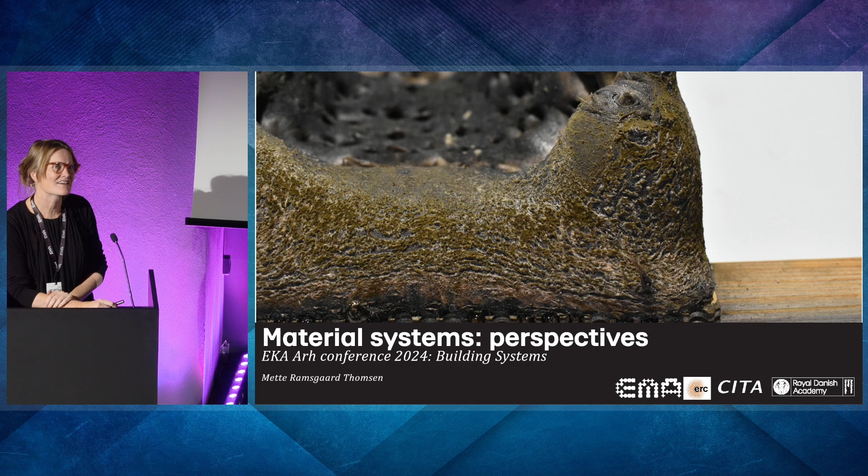I think it's a really nice nesting of different questions. I want to show some of the projects we've been working on for the last couple of years, and obviously Cameron has already shown some of this work. Just to say a little bit about CITA.

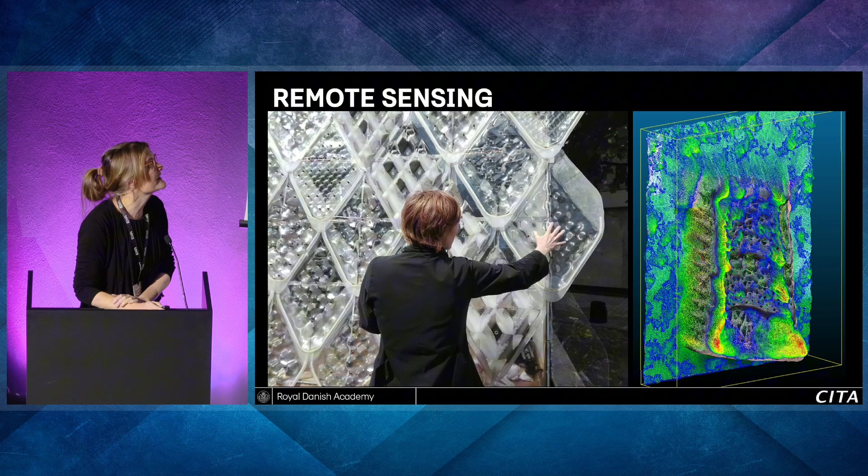CITA, I still have this feeling that CITA is all new. I don't know if you feel the same, Fabio, but it feels still so fresh and young when we started all these things, but it is 20 years old. I think CITA has been many things over a long time, and really the people that passed through CITA have also informed our practice and left deep marks in how we are thinking about our practice and the questions that we ask. We look at questions of robotic fabrication, new material processes, advanced modeling, remote sensing.

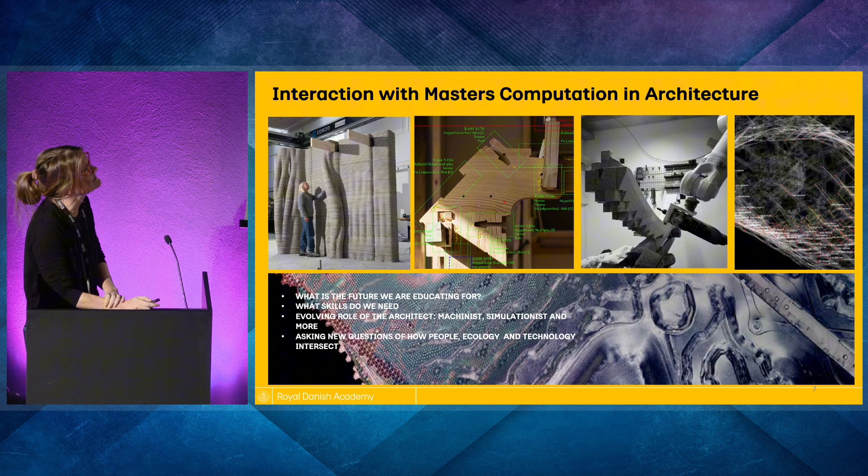And we work very closely in interaction with our master's group, Computation in Architecture, led by Paul Nicholas and Natalia Guillem, where we are looking at similar questions: what can architecture become, how is it that we are working with materials, what is the future that we are educating for, and also what is the future role of architects—to not take for granted that architects somehow perform the same as 100 years ago, 50 years ago, even 20 years ago.

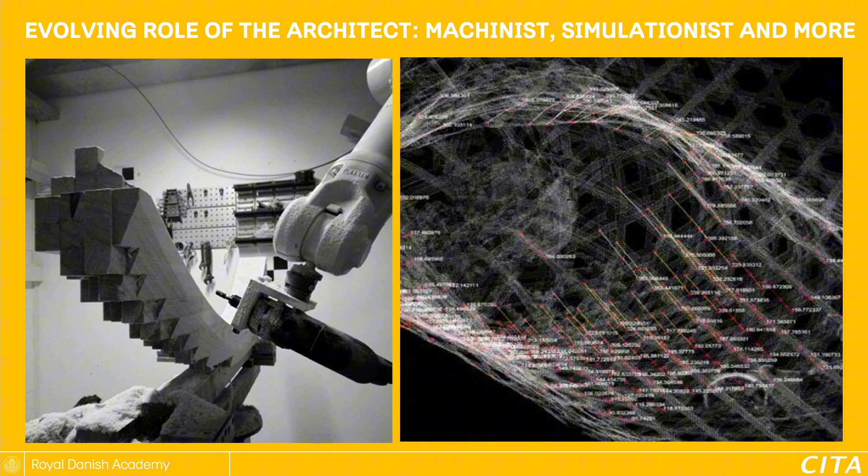I think the tool sets we're working with, the questions we are addressing, the ways that we can design and fabricate, are radically changing. And it's important that our educational environments and our research environments are very closely knitted to create those synergies.

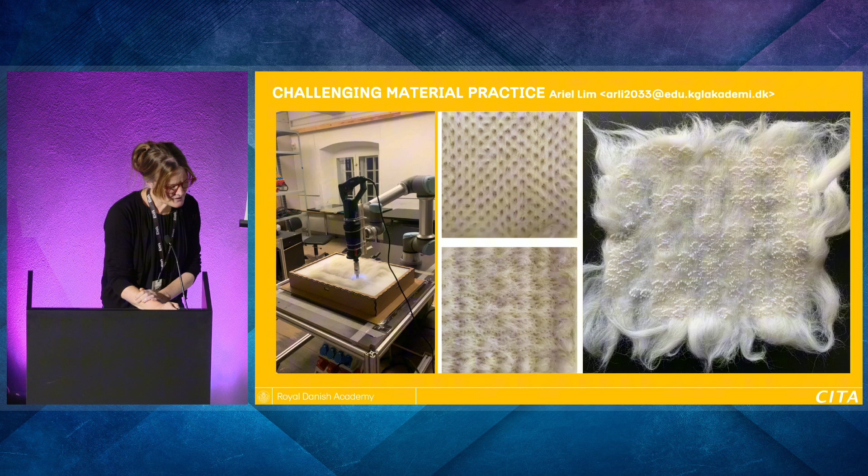Maybe most fundamentally, and what I wanted to talk about today, is really the role of technology and the idea of technological development. We work very much with an idea of design integration, where we ask how we can think of design as a driver for technological development, but also a fundamental understanding that technology is not something developed elsewhere and ported by invisible hands to the field of architecture, but that we are continually participating in its co-production. And by that I mean not just the architects, but the questions, the sites, the programs—the work of architects is changing and challenging what technology can be.

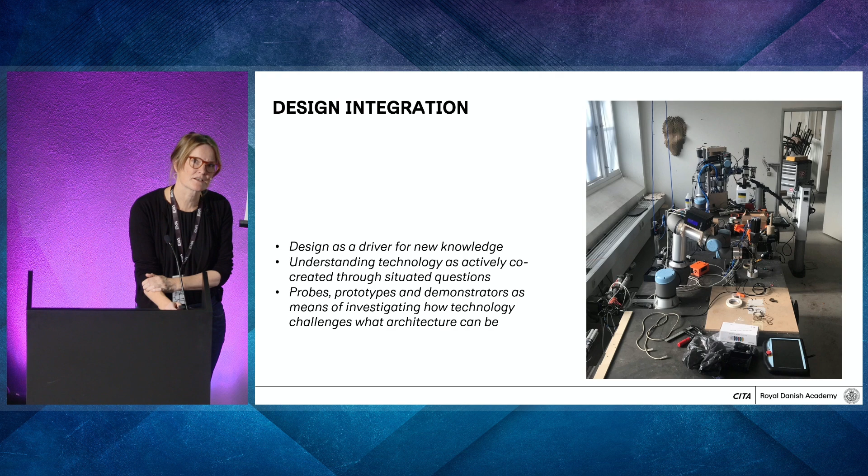And I think that's a very different starting point from many of the technological traditions that sort of boundary our field. So we understand digitization as a basic research question, which creates new possibilities for what architecture must be able to do, how it's executed, and through what and by whom it is constructed. A bit close to your man and machine, no? So how do we ask also who are the people who are involved?

In our part of the field, and here I talk very broadly about all of us in the digital design field, I think the idea of sustainable practice has been quite fundamental for the whole foundation of the field, but it has very much been linked to a question of optimization. So it has been under the remit of smarter with less—how could we optimize our practices and de facto build lighter so that we can reduce our impact on the environment, on resources, on transport, and on pollution.

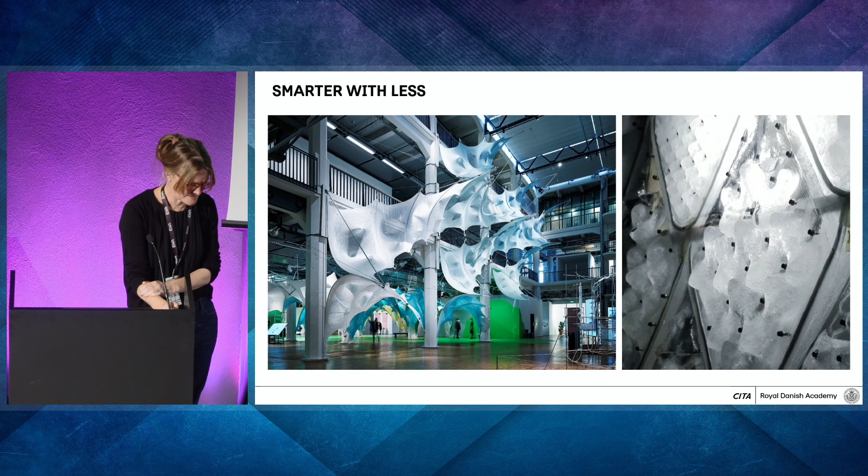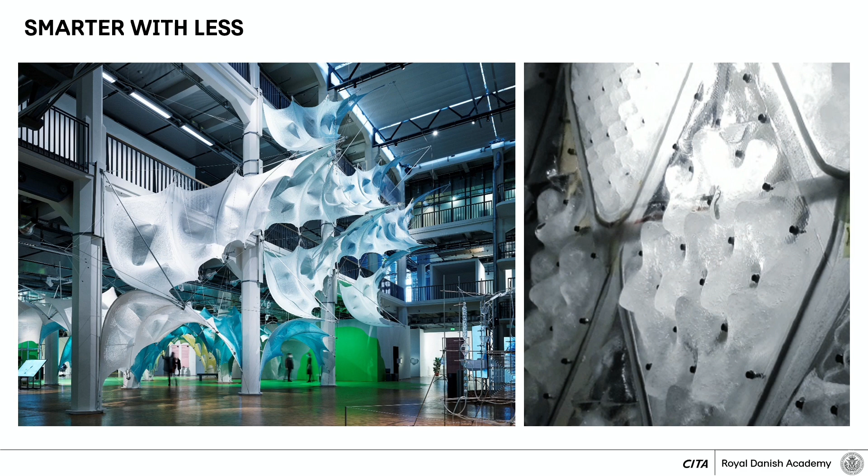And in our work, this has also informed a breadth of projects, which really span across these 20 years of architectural investigations we've been involved with, where we have been asking how computation allows us to work with new ways to use traditional materials, or traditional ways to work with new materials, and how that really allows us to think very differently about what materials can be, and exactly where the role of representation, the computational model, the information model, changes its role inside of the practice.

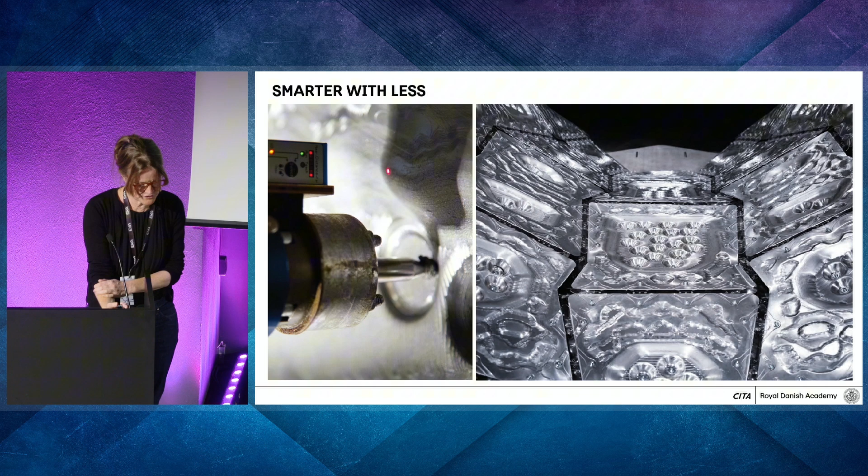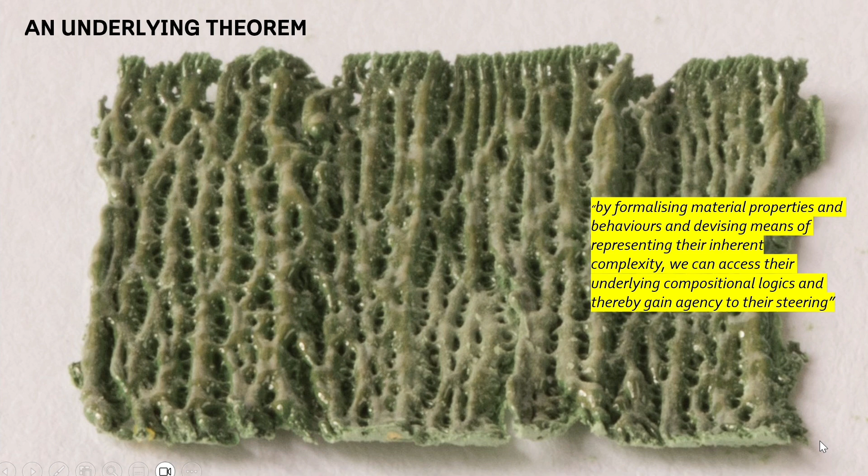And where we can connect with new ways of shaping functionally non-standardized materials, optimized at a micro level, with the breadth of architectural practice. I think there's an underlying theorem—it has different names in different parts of the field, it feels like every design group or computational design group has its own name for this—but what's underpinning it is really a rationale or theorem. Nobody knows if it's true or not, but a theorem which is that by formalizing material properties and behaviors and devising means of representing their inherent complexity, we can access the underlying compositional logics and thereby gain agency to their steering.

I think in many ways what Fabio was also showing today was also this sense that you can somehow steer the material logic, the structural logic, and thereby also gain, when we are showing these foam experiments, how do you steer these material systems?

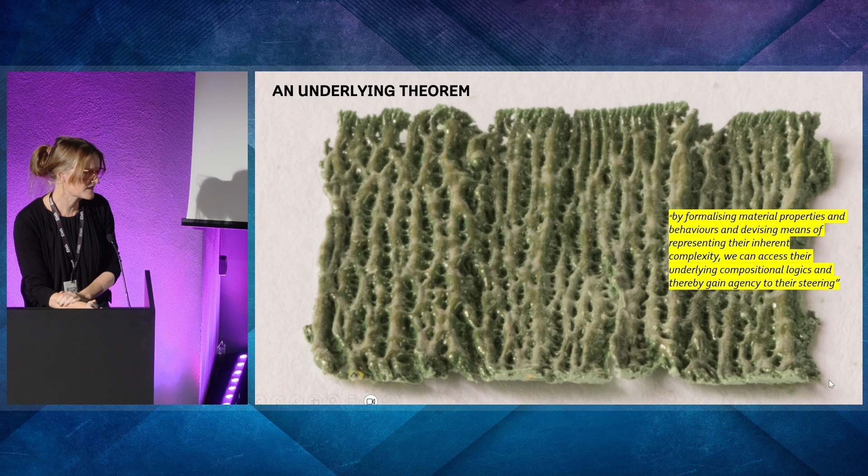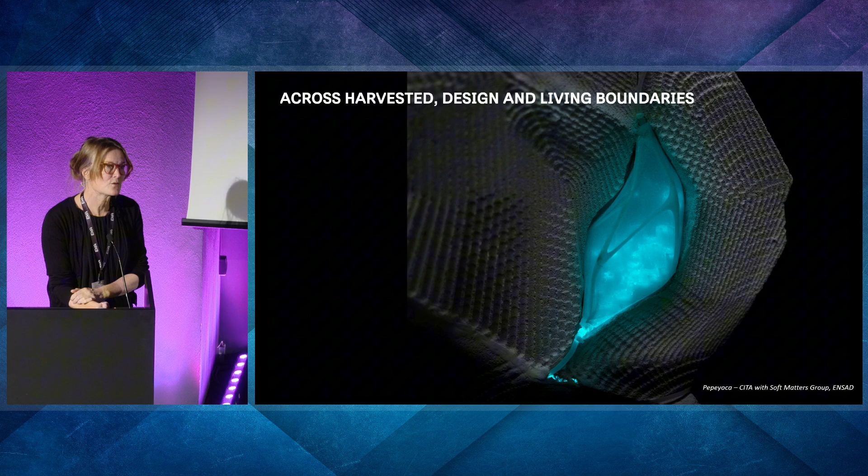I think we should remember that this is a theoretical position. When we start designing new boundaries for our field, it becomes a question of what is the material system we're trying to develop or interact with, and that we're expanding our system boundaries as we start working with living materials and engineered materials, so that what we are steering is not only a piece of steel or some concrete, but also organisms that have symbiotic relationships and are co-producing our designed spaces.

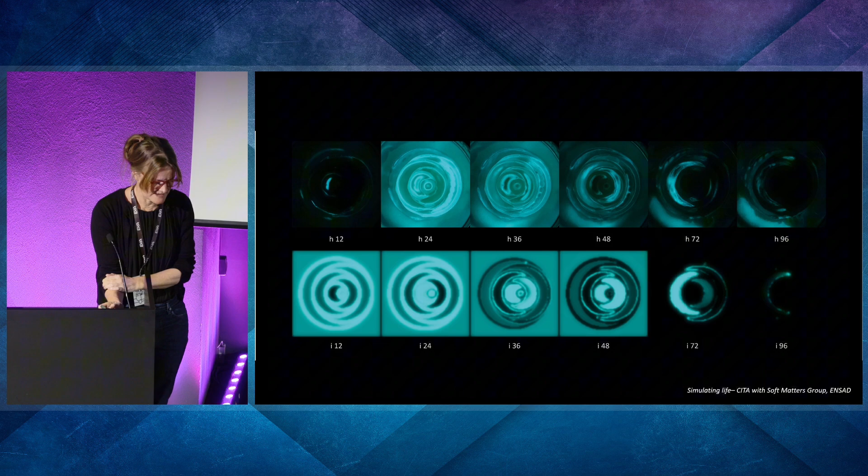Yeah, so this idea that we can understand, represent, and control in order to functionalize material systems for architectural use. I wanted to take that as a springboard to think through our newer projects and start setting some questions to that theorem.

Here I wanted to talk about the EMA project, the eco-metabolistic architecture project we've been working on for the last 3 years, with 2 years left, which asks what are the transformative shifts that working with biomaterials have. In the field we see a lot of movement towards bio-based materials, towards timber, towards renewables, and there are straightforward sustainability questions that lead us into this. But I think what's very interesting about it is it's a relatively uncharted field.

Timber construction is 20,000 years old, we've been building with timber forever. But at the same time, only 10 or 15 years ago, timber was still considered an experimental material, a material that is difficult to control, difficult to fire regulate, and difficult to engineer in more than single-story or double-story buildings.

So what we're asking in the EMA project is really, how do bio-based materials in a broader range allow us to think very differently about architectural axioms such as durability and permanence. It changes our understanding of value, of durability and fabrication to work with materials that are essentially metabolistic, that have embedded into them a system of return, or a system of biodegradation.

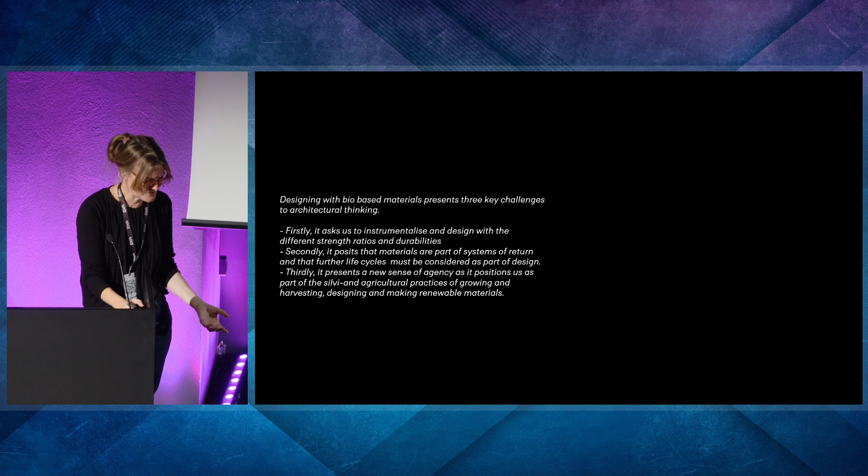Now, bio-based materials are essentially weaker and less durable than their finite material counterparts. Secondly, it argues that materials are part of systems of return, and that additional life cycles must be considered as part of a design system.

And also, it presents a new sense of agency as we participate in cycles of growing and harvesting materials. Here I mean in the really big sense, yes, grow, harvest tree, but also grow, harvest algae and bacteria, and the whole breadth of material systems.

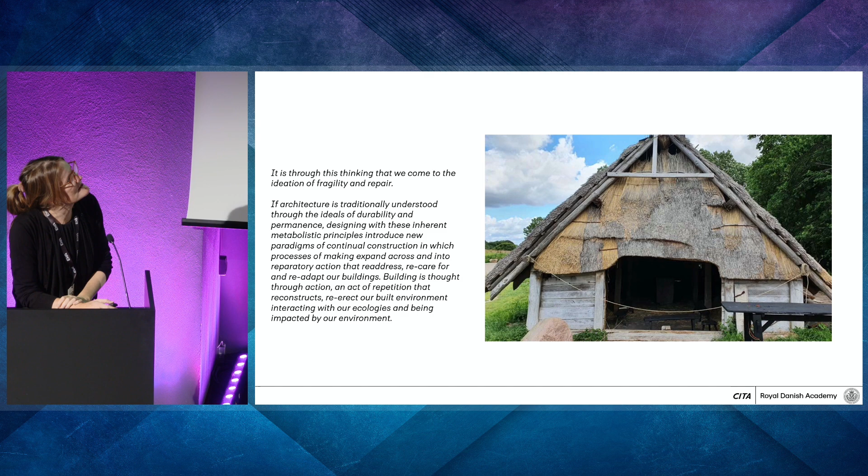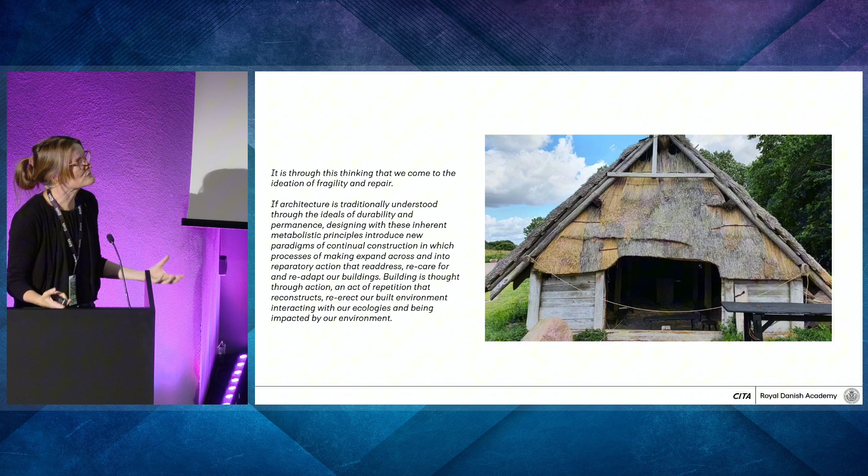And this leads us to a very different ideal. As Cameron was showing before, I think what we're interested in this picture is this idea that some of that thatch is new, done last week, and some of it might be 300 years old. So how do we build buildings that are continually constructed, continually addressed, and how do we develop systems that are able to think about materiality across multiple life stages.

And orchestrate their systems of replacement or systems of repair.

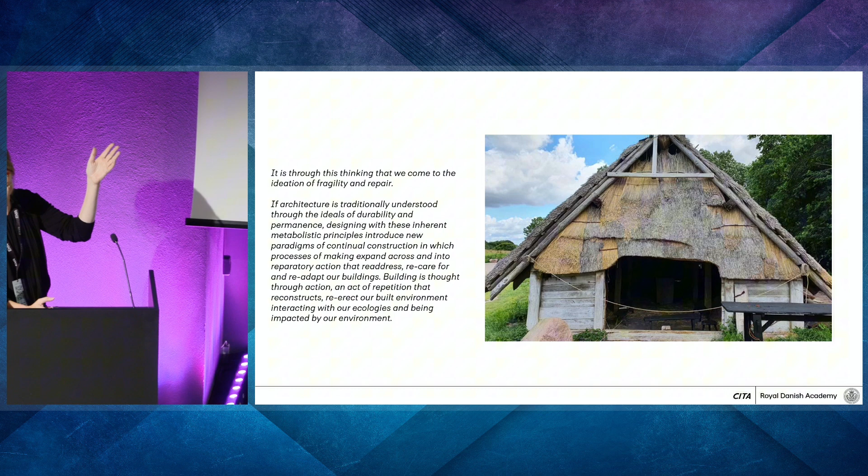So sometimes I feel like it's interesting to remember Corbusier looking over the Parthenon, or what was the modernist ideal? It was an idea of durability through material solidity. And when we turn to bio-based materials, we start seeing something that has a very, very different temporal clock.

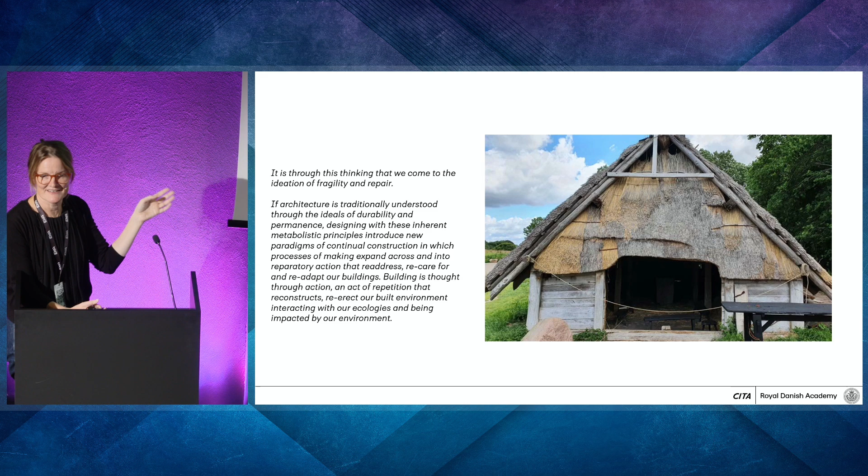And in reality, it is not so novel. We have been repairing our buildings forever, but we might move our gaze and look towards that kind of time, where time is constructed through ideas of re-engagement, and therefore build ideas around stability and endurance as performed acts, something we participate in.

A big piece of rock lasts forever, or I participate. I'm very curious towards that.

Again, I also want to just put a caveat into this. I think it's really important when we work with bio-based materials that we remember we cannot grow ourselves out of the problem. It is not possible to place ourselves in a fully renewables economy. There is a finite amount of photosynthesis happening on the planet, and the moment we start using that photosynthesis to grow plants for built environment products, food, all of that, there's something else that suffers.

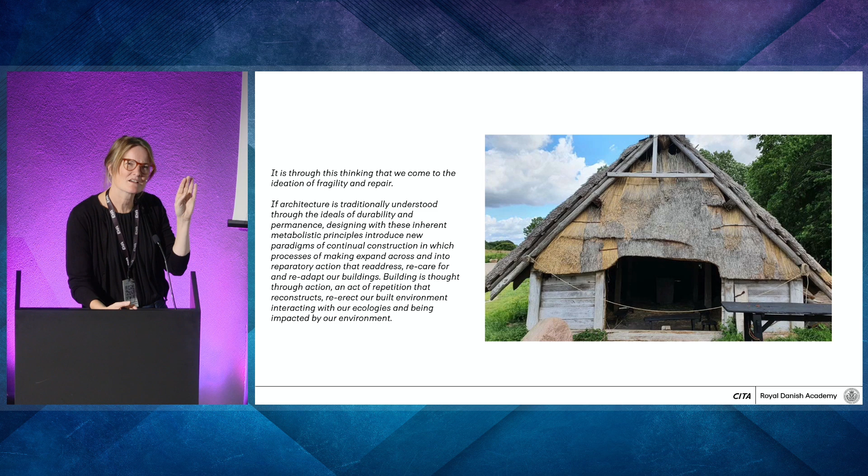So I think it's more just a curiosity. How can we build new models, and how can we bring these models back to a more holistic way of thinking about circular design and replace circularity.

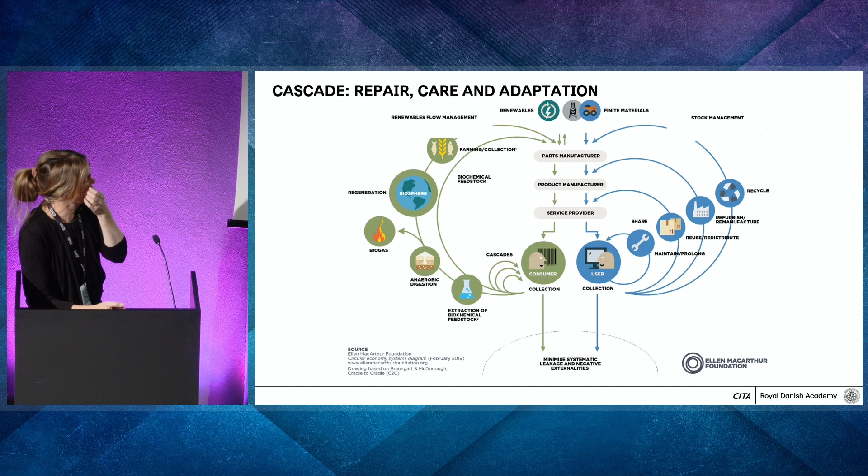Yeah, so I'll try to come back to the script here. So in ways that we have been looking at, this is also a critique of the circular design framework.

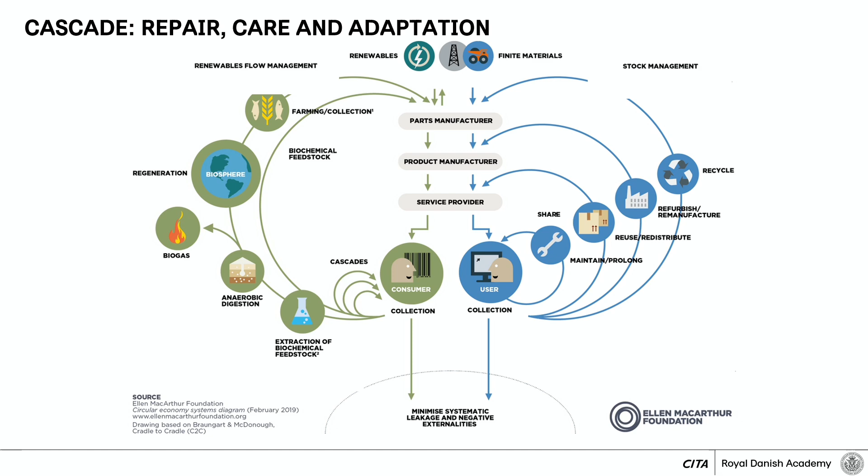Again here, as Cameron also did, placing the Ellen MacArthur butterfly diagram as a sort of core inquiry. Here we see cascading, and we also see the difference between the blue side, which is the finite materials like steel and concrete, and the green side. We can also see that things here are not really cascaded, but rather sort of metabolistically downgraded, finally ending up in energy.

What we're curious about is how we can build new models on this green side and kind of fold the butterfly together to find new ways of working with finites also, challenging us to think very differently about lifespan.

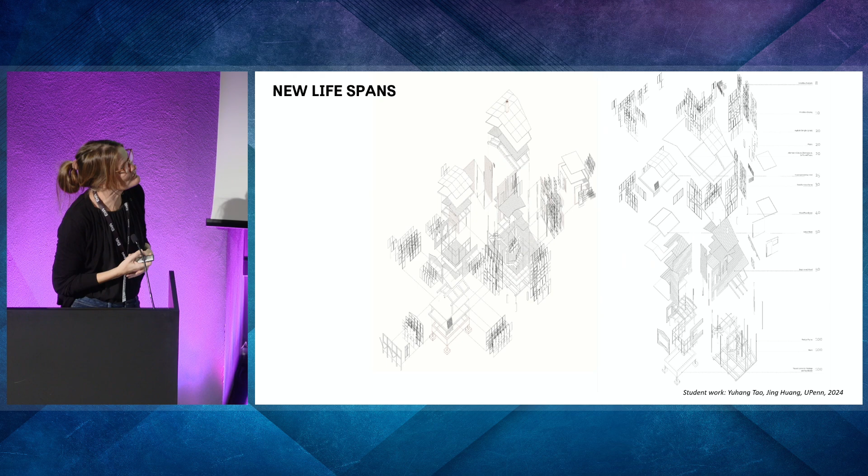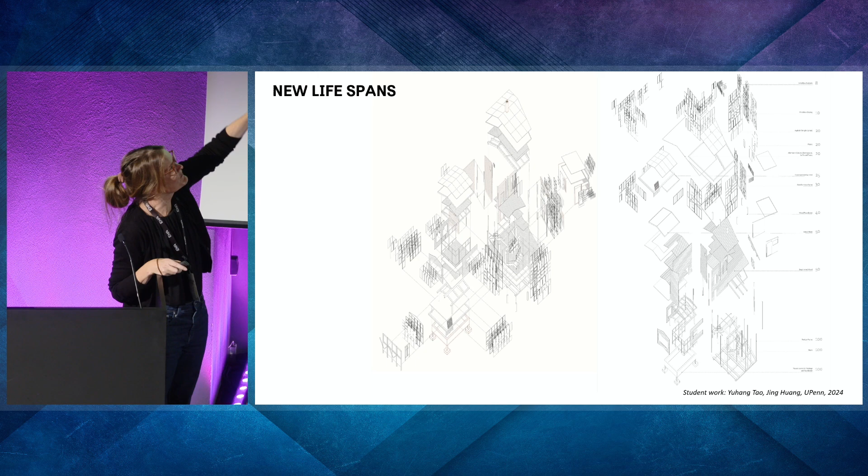These are drawings of small huts in Christiania done by my students in the US, who are really looking at how we think tectonically about how materials are placed together, but also temporally thinking in lifespans, placing the deeper lifespans at the bottom and the shallower lifespans at the top.

And placing ideas of continual construction around ideas of technological development. One of the key things we've been very interested in trying to develop is ideas of placing fabrication into these cycles, thereby challenging the sites of production and also the idea of technological development.

I think it's such an interesting concept, the idea of broken world thinking coming out of science and technology studies from the Anglo-Saxon context. It's quite an American and UK-based theoretical field, which comes out of ideas for media studies, telephones, and repair workshops, where Steven Jackson from Cornell very assertively positions that the world is always broken.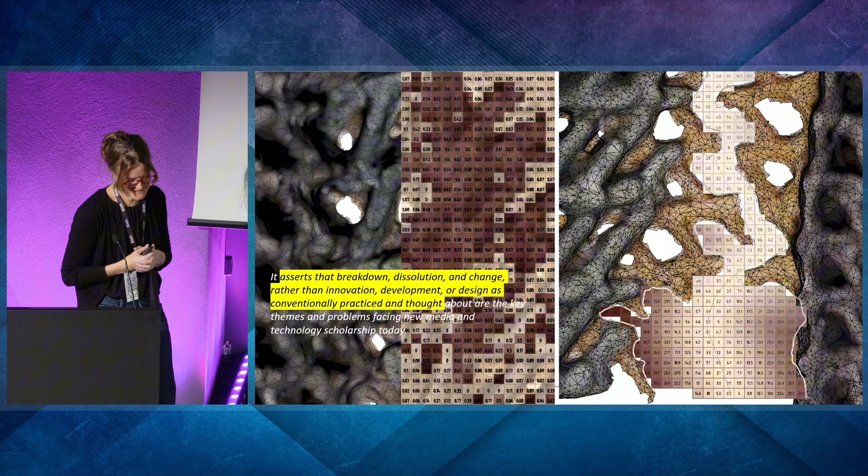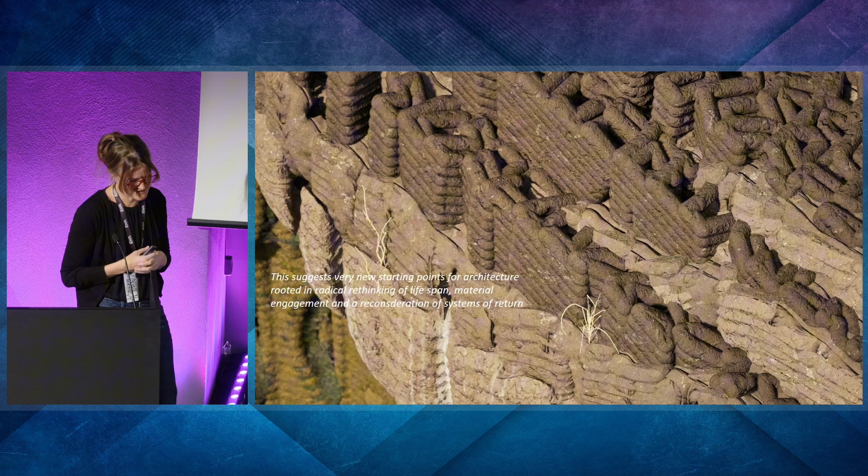So it asserts that breakdown, dissolution, and change, rather than innovation, development, and design as conventionally practiced, are the key problems facing new media and technology scholarship today, and that suggests very different starting points for architecture, rooted in a radical rethinking of lifespan, material engagement, and reconsideration of systems of return.

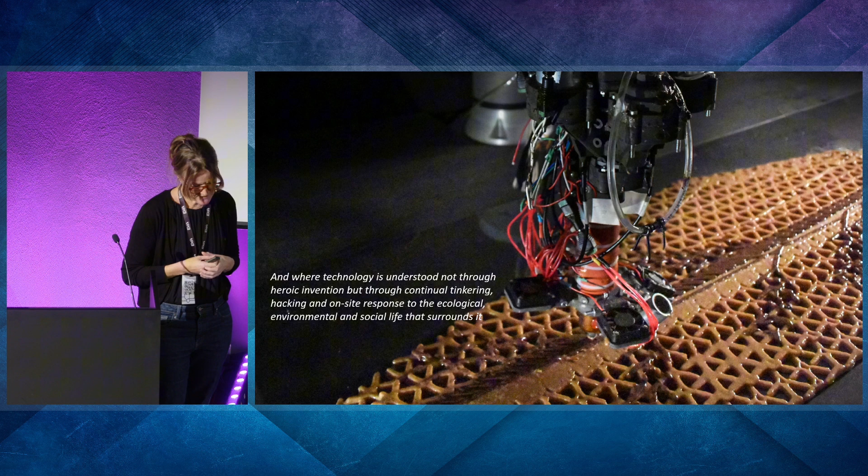So at CITA, we're very inspired by this because it sort of changes our foundations, both in the condition of architecture as well as its invention. So how is it that these technologies are orchestrated? Where are they placed? How do they move from the comfortable, secured walls of the lab and start breaking through and positioning themselves in response to environment, ecology, and sociality?

So I wanted to show a little bit of examples, and we are tentatively—it's a working model—trying to distinguish ideas of adaptation, repair, and care as different modes of these reparative theories.

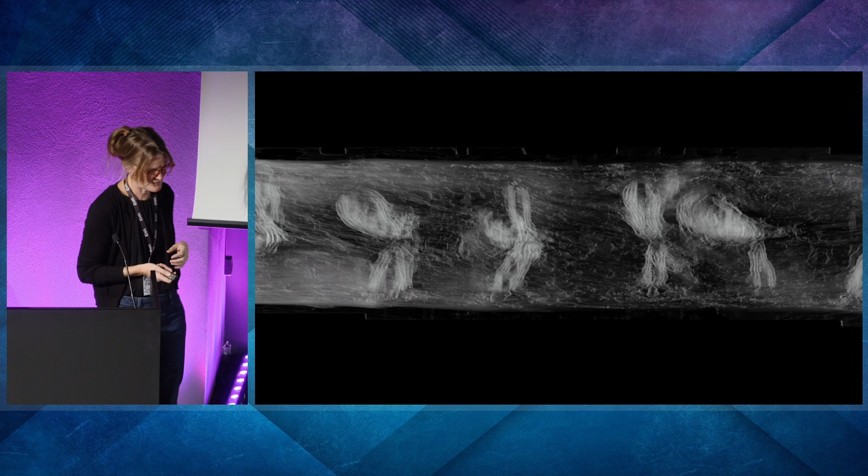And so we sort of think maybe adaptation to timber, so how to work with harvested materials and material reclamation. In this project, we are looking at—Cameron also mentioned this—we're looking at building, reclaiming our own materials.

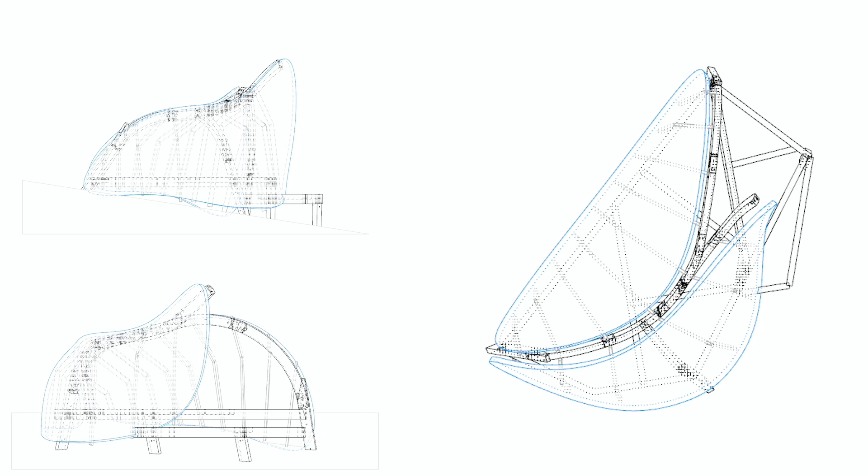So as Cameron was saying, we built these installations a couple of years ago, and we're now looking at how we can reclaim these elements and reposition them into new lifespans, new architectures.

Here we're building a little shelter. It's a small shelter to sleep in, and we're putting it into a forest.

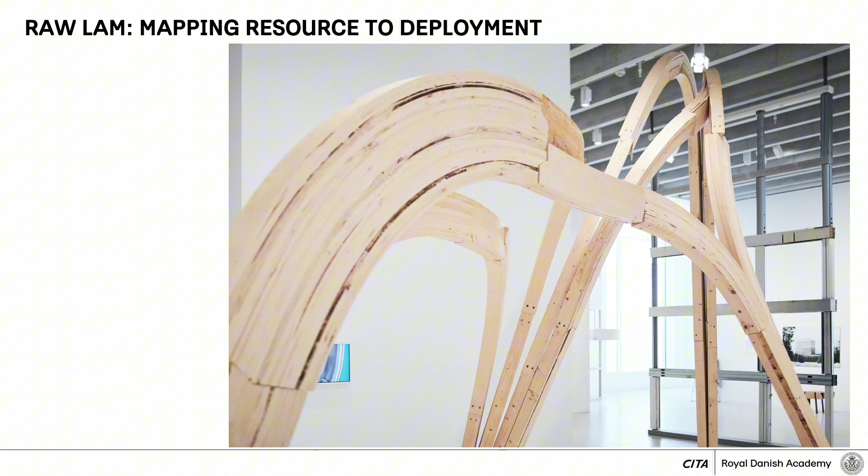And what we were doing in this project, reclaiming the material, is we were working on making these design-to-fabrication workflows that allow us to very intensely understand material performance, material qualities, and be able to orchestrate them.

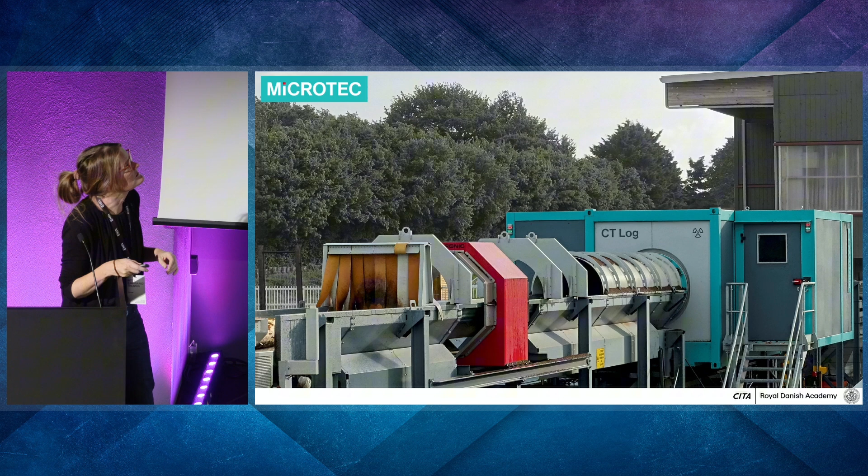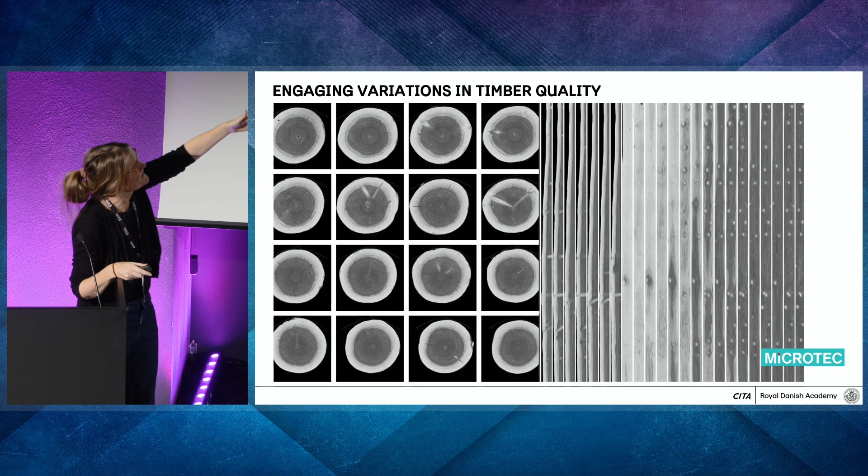So we're in a way structurally optimizing from a material level, allowing us to orchestrate. In a beam, the material in the middle needs less quality than the material at the edges. We know we have to have high quality around any kind of joining, so we can create these material variations, which is very ordinary in glulam construction. We often vary the different materials, but we're doing it at a hyperscale and design-integrating it.

So we have a lot of knowledge about these beams that we want to reclaim. We know where the knots are, we know where the material intensity is changing, and we want to find out how we can put them into new structural systems and redeploy these material maps that we have of them.

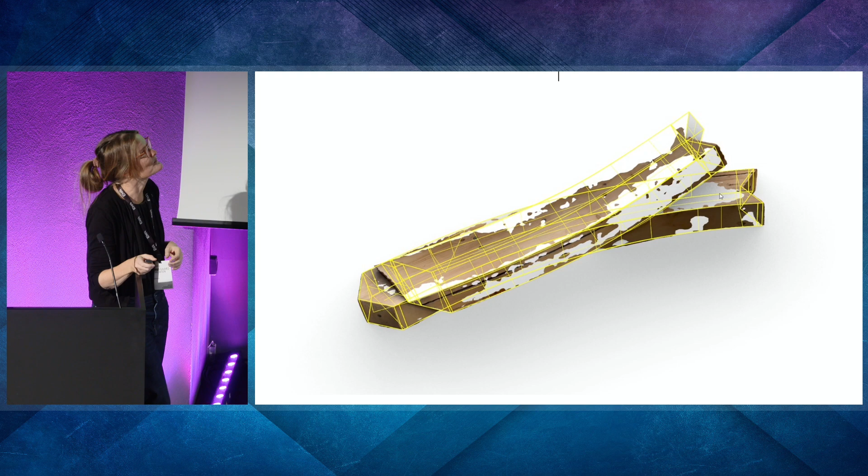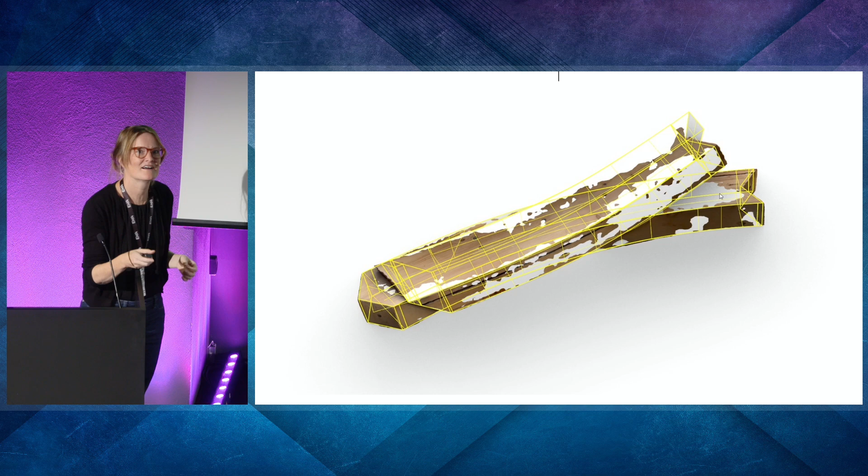And this is turning out to be much more complicated than we thought. The beams are double curved and so on. They have moved. Also, there's data missing. There were hacks done in the fabrication environment that meant that even though we have fabrication data, things changed. This is totally normal. So to retrieve this information through ideas of the history stack is turning out to be very complicated.

At the same time, it's a composition - we're not only working with one material stream, as in any building we have multiple material streams. Here we're working with Luleå Technical University and Omtre. Wendy was here this morning, I think she had to leave. Omtre is a Norwegian company looking at reclaiming timber, and they kindly gave us some old barn timber and also some very mysterious 2x1 struts.

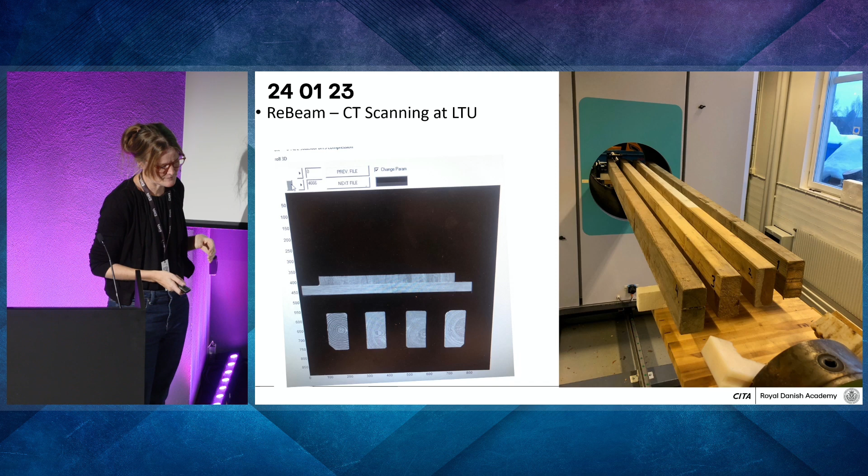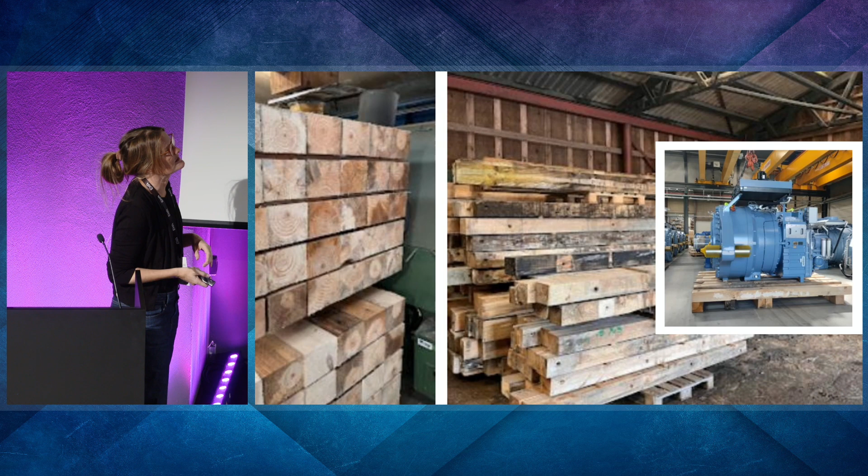What we're then looking at is, okay, can we put them into the same material or digital workflows? Can we CT scan them? Can we build material maps of them? And can we integrate them into these strategic optimization workflows? I think what's really interesting is understanding where these material streams come from, what we actually need to know about these materials.

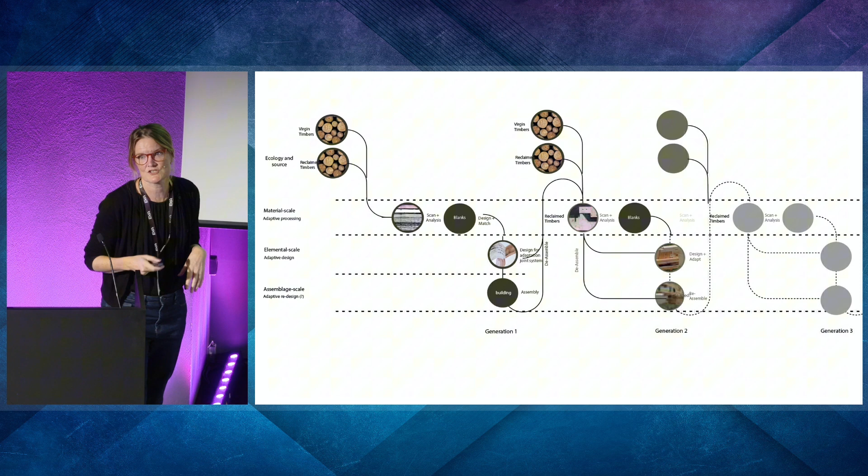When we work with reclaimed timber, they are much more heterogeneous than when we work with virgin timber, and we need to develop methods by which we can recertify these materials batch by batch, which means we need non-destructive methods of certification. We drew this diagram, Martin and I, literally yesterday, I think.

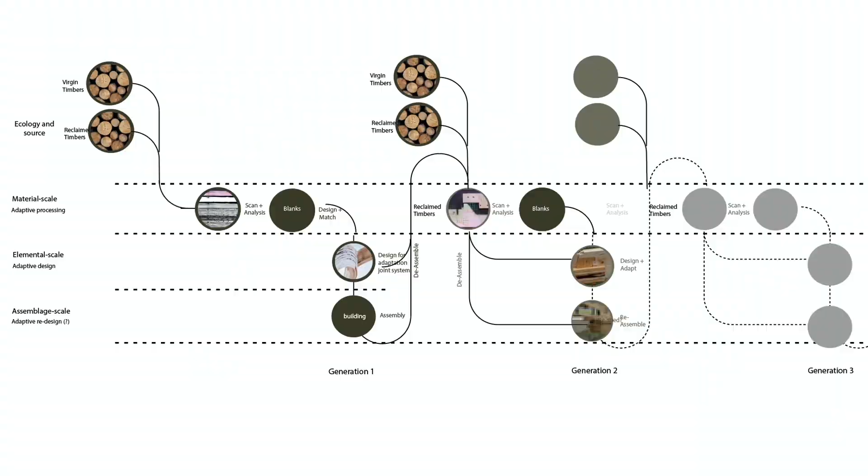A second overarching question is the question of repair. And here we're using biopolymer composites as a material system to really think these things through. The interesting thing for us about the biopolymers is really the recipe aperture.

So they are built, they are designed through these different recipes, and it's a space - it's not one optimized material, but a set of different materials where we can vary the recipe in response to, first we thought structural performance, now make it stronger, make it weaker, and so on. But we learned very quickly that when you're working with circular design, the idea of these so-called waste streams doesn't really exist.

Markets can be very quickly saturated, and material flows that you might have depended on in one year can change very dramatically two, three, four years later, either because new industries are absorbing the material resource, or simply because there was a bad harvest, or other different events. So we enter a place where material flow becomes very dynamic, and we need resilience in our way of understanding material systems to be able to navigate those.

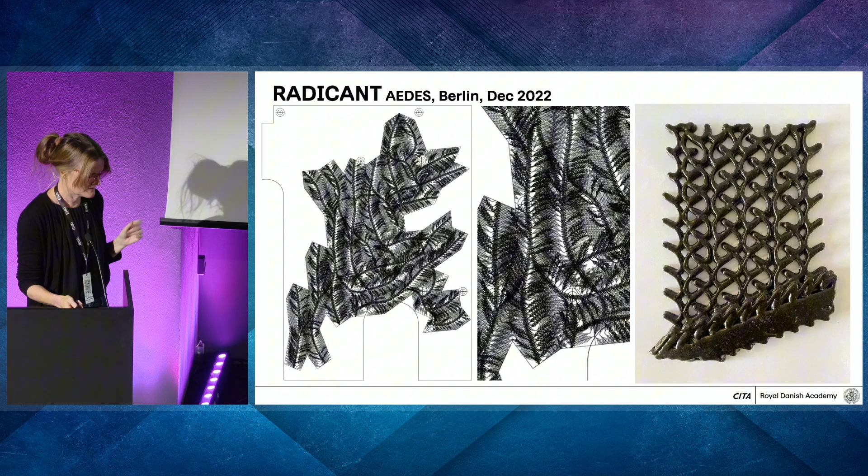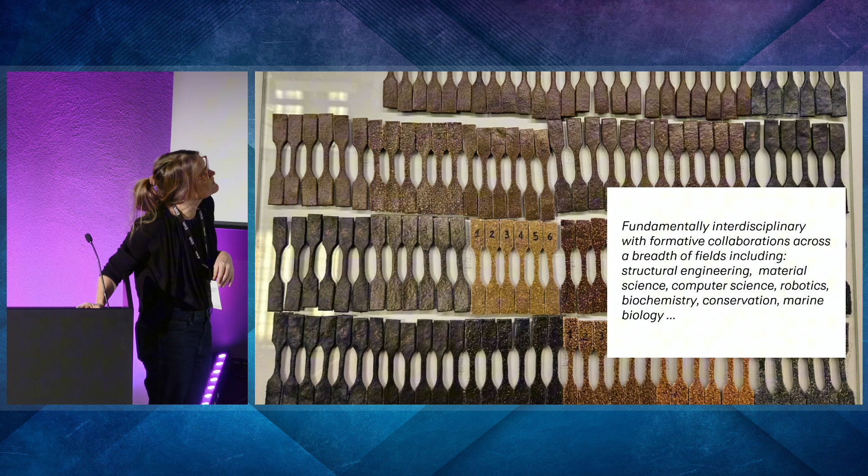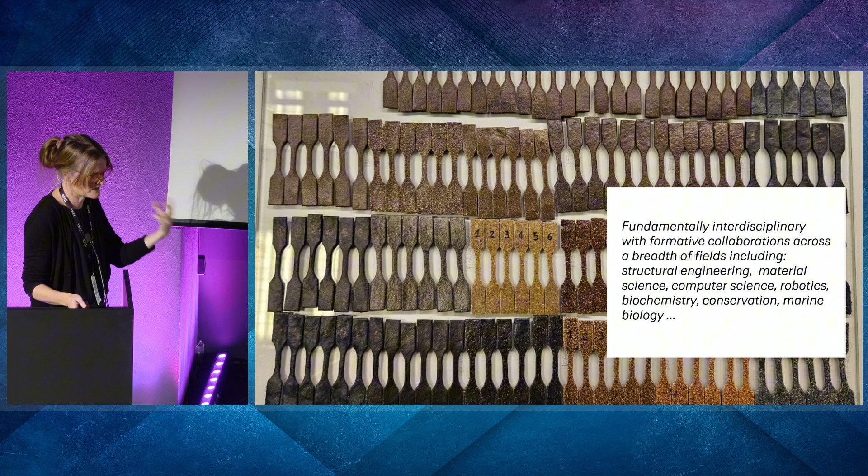So in the biopolymer track, we're looking at these different material systems and different material flows, looking at how we can compose architectural paneling systems from different recipes of biopolymers. We're also working across disciplines to characterize these material recipes and their changes - how different are they actually, and what difference do they make when we start changing the materials. Here Gabriella Rossi has been doing her PhD looking at how we can use machine learning to navigate the recipe space.

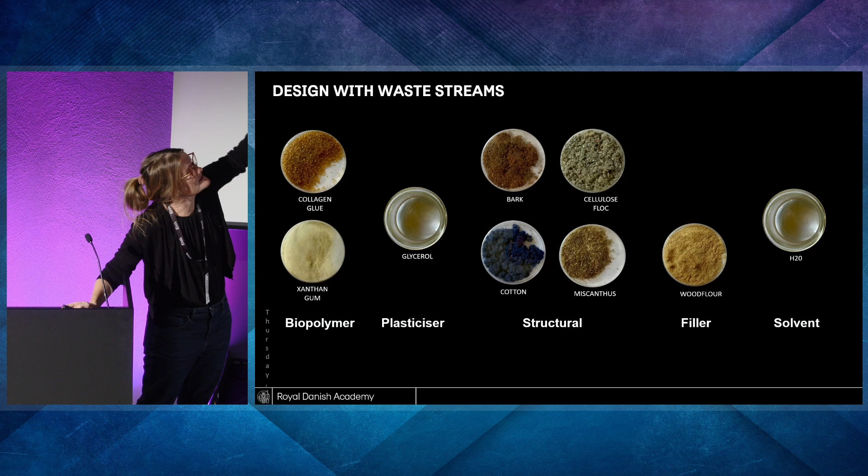So if we imagine putting in these different material sources, different cellulose sources coming from different bio-based and waste-sourced streams, I want to understand what is the difference between these materials and how do they perform differently, both in fabrication and in structural performance.

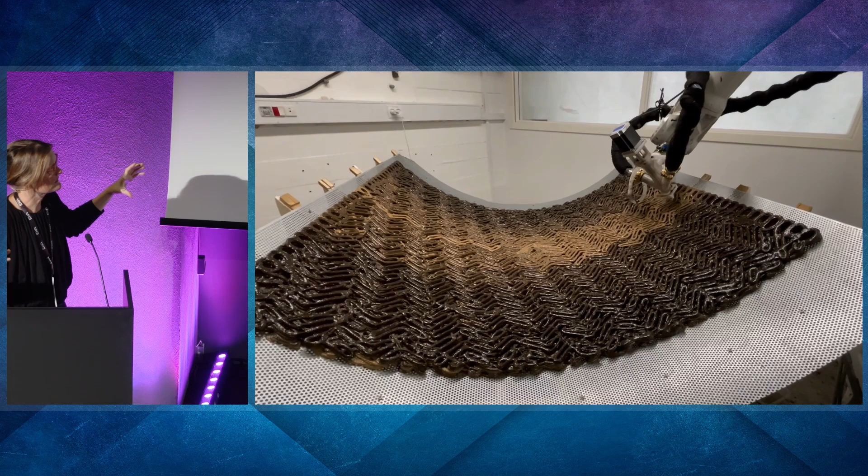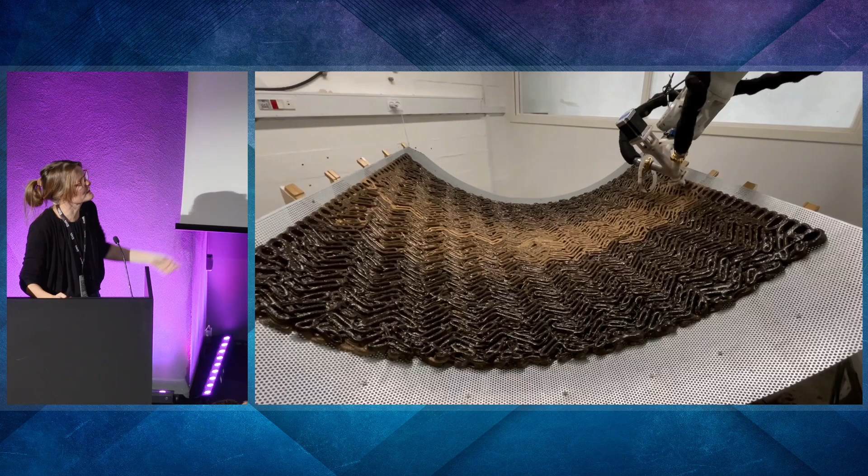Right now we're working on a project called, we gave it a name yesterday, Riserial. Anyway, it's a vault system where we're trying to 3D print with these materials and grading these materials. So we built an extruder head that can have multiple recipes at the same time, where we're able to create these vaulted panels and put them into an architectural system where we can really understand the flow of the material and also the recipe variation, compositionally as well as performatively.

Which leads to questions of durability. In these projects, they're placed inside. We have very big humidity differences in Denmark, as I'm sure you have here in Estonia too, but they are very well protected. Once we start placing these materials outside, we get very different behaviors. What we're interested in is really trying to understand these systems, not necessarily as a mature building system with which we will make architecture tomorrow, but maybe as a model system by which we can start understanding the methodologies we need to work with temporally changing material systems.

Our students are right now in Norway. I got sent images from the stave churches they visited yesterday, and I think it was really beautiful. How old are they? 600 years old, 400 years old, something like that. Very, very old timber structures.

What we can see there is that the shingle is exactly temporally stratified. So there's shingle that's 300 years old, shingle that's 100 years old, and shingle that's 20 years old. So this becomes maybe a bit mystic - what are we actually studying here? Are you going to build a building that's made out of bone glue? This idea of temporality in the building is something very direct.

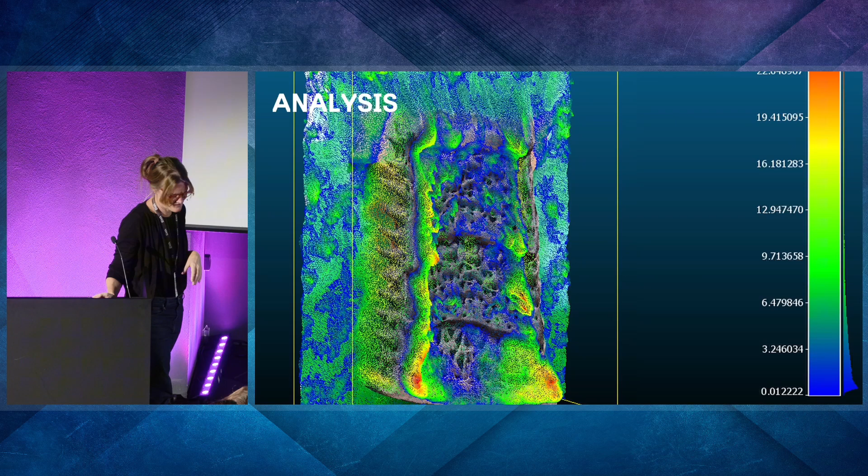So what we're trying to do is find ways of analyzing this and being able to characterize material systems over time, and also to build a new vocabulary by which we can start thinking about these material systems. So new topics such as diagnosis, repair strategy, building pathology creep in from other fields such as conservation and preservation. I think these interdisciplinary surfaces are incredibly inspiring.

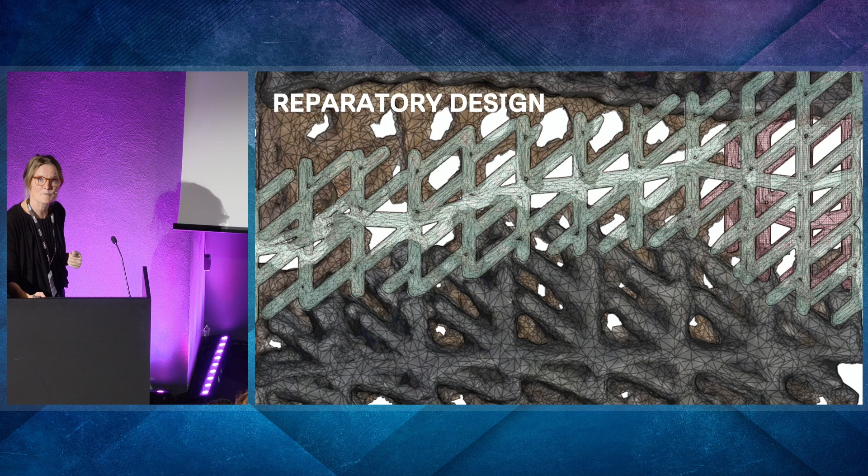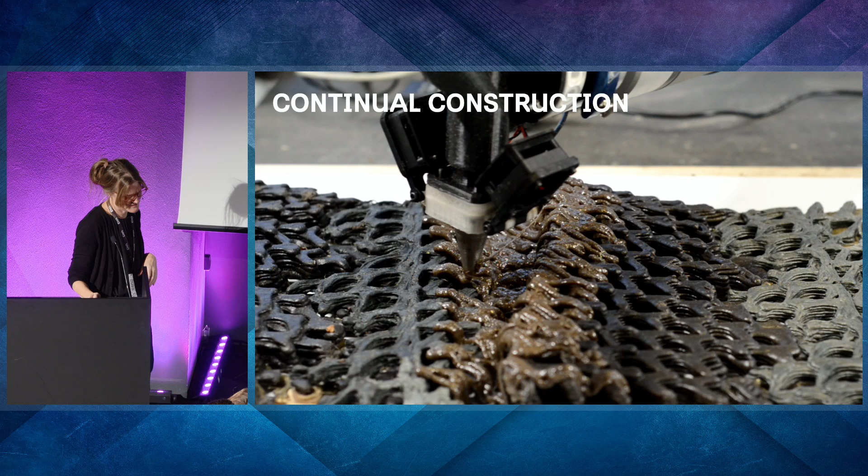In our work, we are really interested in this idea of design for repair. How do we design systems that are open for repair and where repair is somehow pre-thought, while at the same time understanding that reparatory action will always be strategic and changing. So here we can see the virgin material, the weathered material, and then the design paths and the methods of conformal printing. I'll just skip that.

These are also questions we're looking at in the studio and at UPenn, where I'm deploying their amazing representational skills to start speculating how this sort of temporally layered architecture would actually be composed. What is its choreography? And how do we start understanding a new language for architecture, which maybe has deep roots in ideas of weathering and so on, but maybe starts giving us other kinds of hooks on thinking about material change.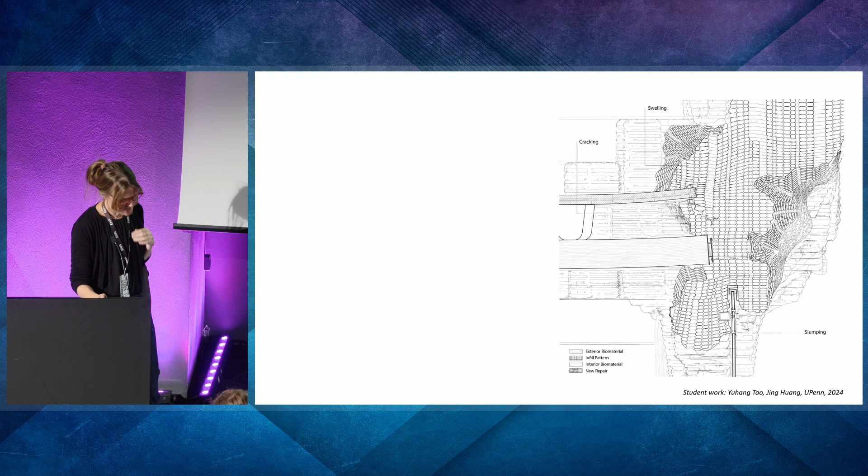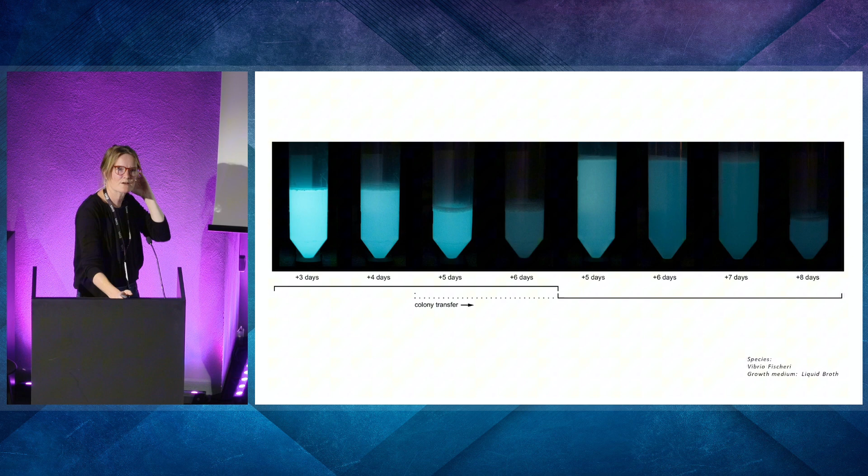So the last project I wanted to show - this sort of architecture of the timber with 20,000 years of tradition, biopolymers with maybe 100 years of tradition, and then here what we're working with is really the idea of biotech, which maybe has a 30-year tradition. These different technological platforms to involve them as part of the foundational architecture of the build. So it's deliberately a very, very broad project.

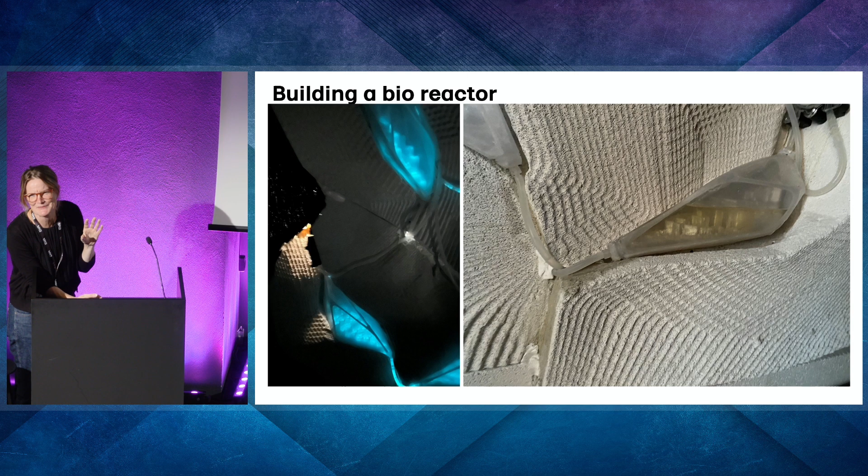Here we're looking at really how we can work with living systems. In the case of Pepe Yoka, a collaboration with the Soft Matters Lab in Penn, we're looking at how to - I hesitate to say - functionalize these living organisms that are light emitting. This is a terrible light source, just to say. I mean, I'm a little bit night blind, to really, on a bad day, you have to stand in there for a long time.

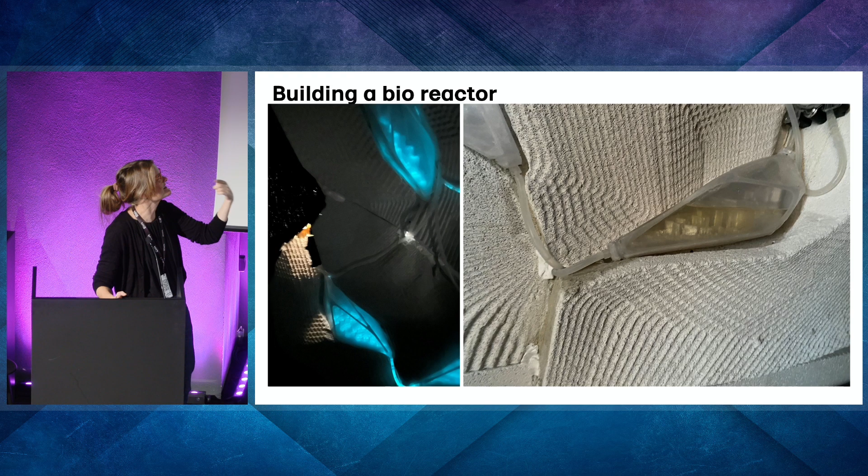So it's not about making a new lamp or something, but it's about trying - what are the methodologies for thinking about how do we even understand what it means to be building with living materials that are kept living? And what are the sort of care protocols? What does it mean to invent care as an architectural subject, and what are the protocols of care that we would need to develop to work with this?

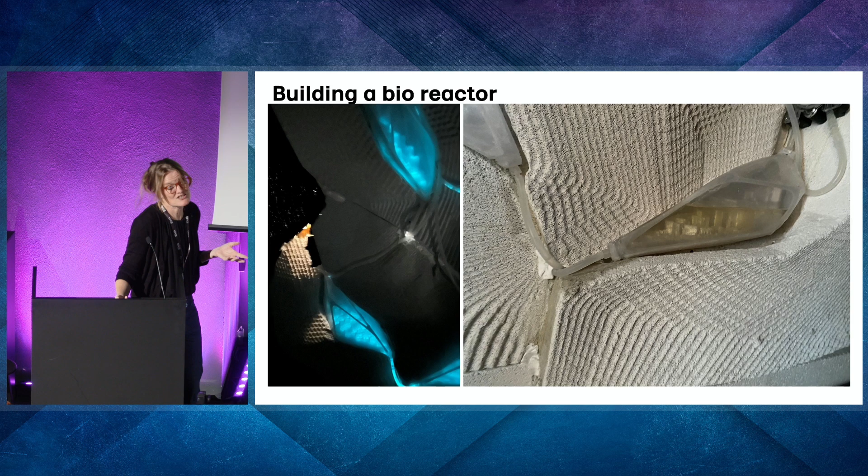So in this project, we're actually just designing a bioreactor. Many design projects have looked at bioreactors before, and what we're trying to do is really try to understand how are they built in time? What are their performances? What are their lifespans? And what is our engagement here - inoculating, feeding, evacuating waste fluids, and so on. What are these new circularities that we need to develop to be able to do that?

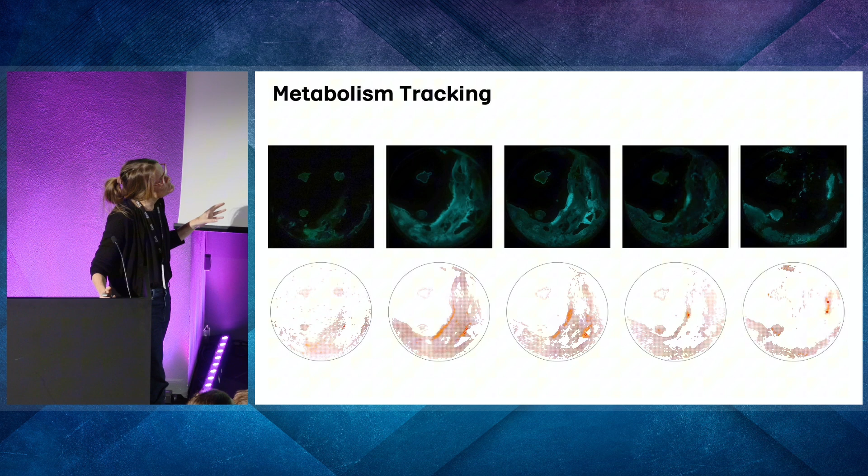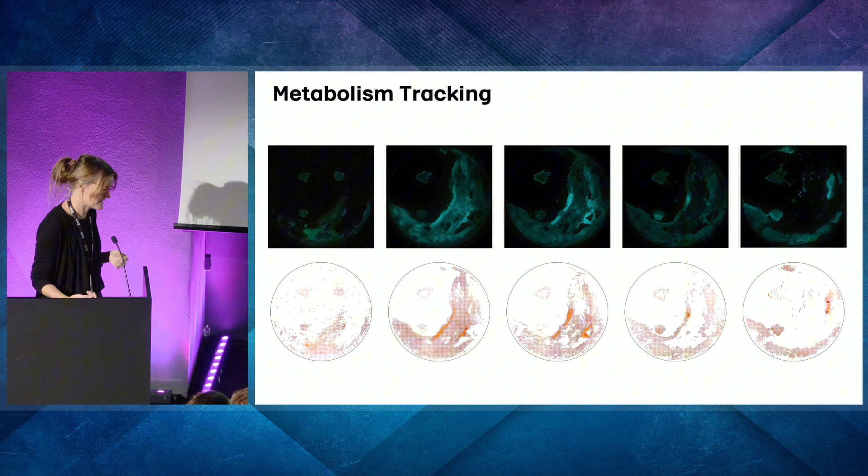And how do we construct new representations that are able to denote the propagation of bacteria through matter? So obviously a very different understanding of metabolistic architectural tradition.

I think maybe we could also ask Fabio whether this is beautiful or not. No, what I think when you say beautiful, I think you mean: is it meaningful? What kind of meaning is this constructing? I think it's a really interesting, very open question.

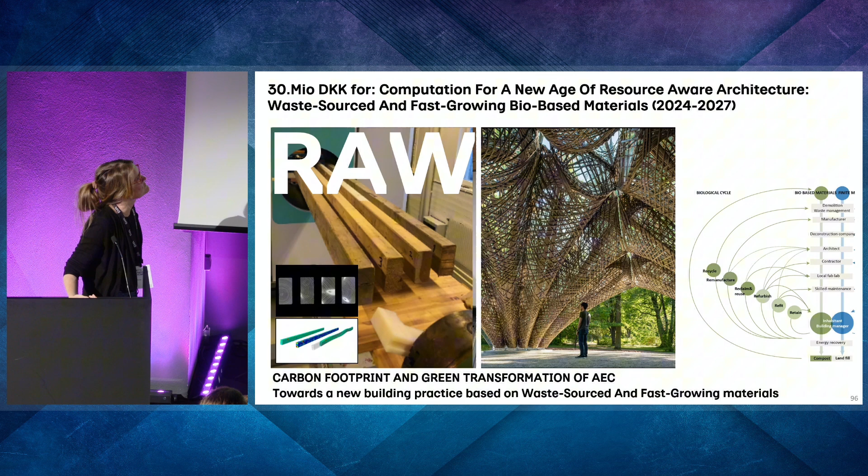Anyway, so if we return to conclusion, I wanted to end with some perspectives in a very concrete sense. We are right now starting 2 new projects. Martin Tamke is starting an EIC project called RAW, where we are looking exactly at material flows of bio-based and waste-sourced materials, collaborating with ITKE, Luleå, as well as a whole host of other partners, trying to figure out how do we characterize materials.

What are the modeling frameworks to be able to do this, and how do we make batch by batch material characterization, non-invasive or non-destructive characterization. In our work on timber, inside the EMA project, acting as a pre-project for this, what we've been doing is looking at CT scans.

But also other kinds of models, such as acoustic - we're hammering the timber to understand the performance of the timber. So what models are there for that, and can we benchmark them against each other?

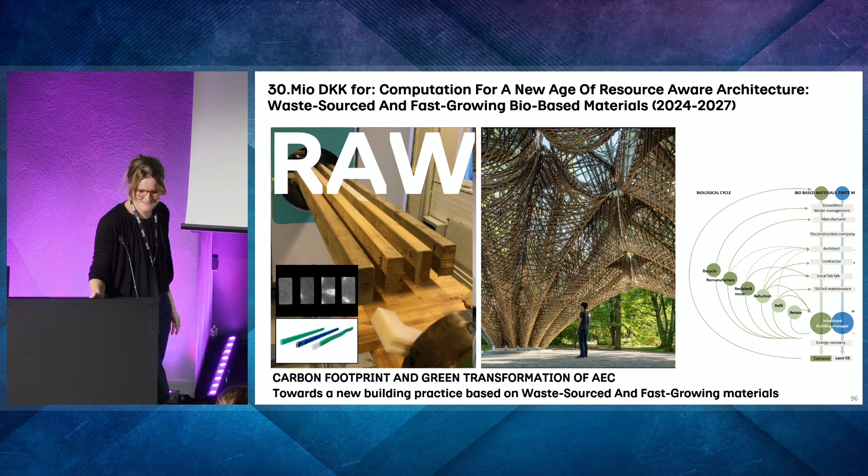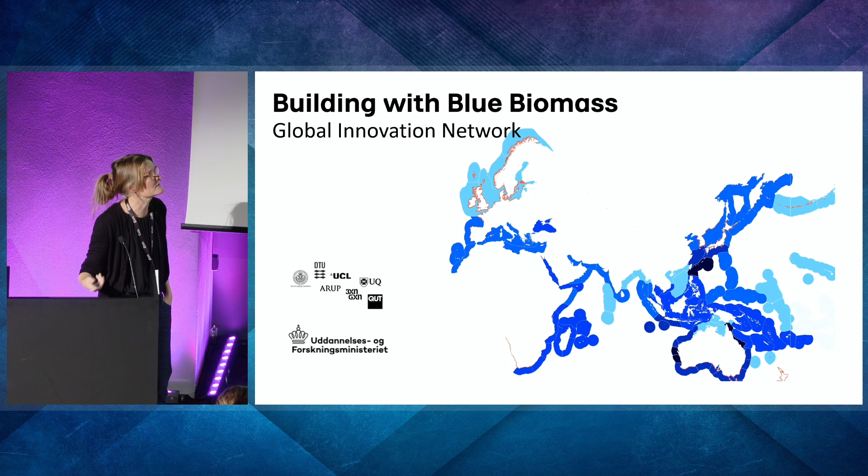A second project, which is also a pitch because it's an open network, is led by my colleague Paul Nicholas, where he's looking at blue biomass. It's a collaboration between Denmark, Australia, and the UK, looking at whether we can source materials from the blue biome - understanding biomes as not only belonging to agriculture or the forest, but also to other kinds of sources - and asking about the regionality of our materials and the impacts that their extraction has on the direct ecologies that we take part in.

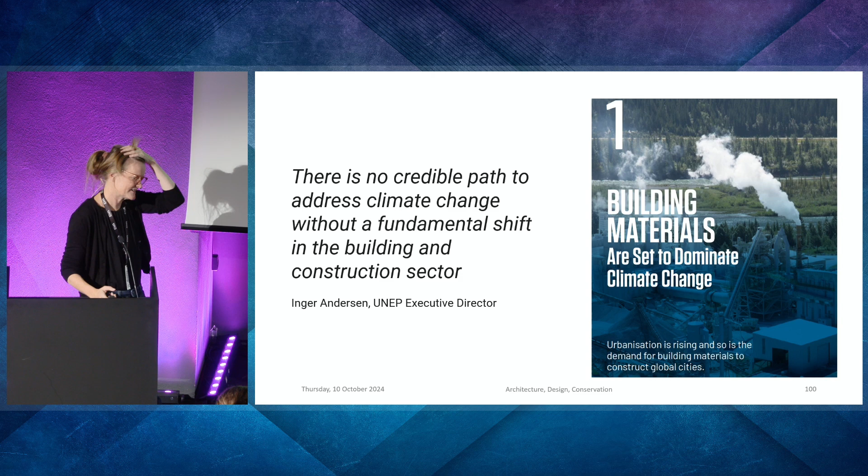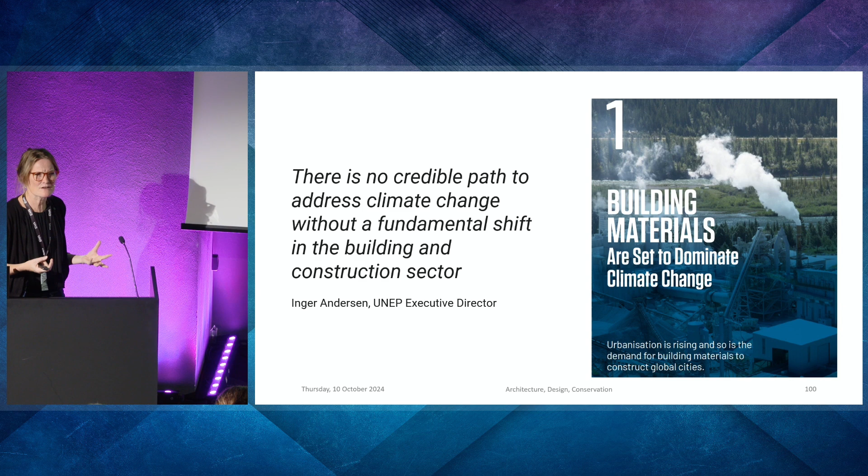With this, I think there are a series of very large questions that belong here, and maybe many of our lectures in these years start here. But I think all of this is somehow to find the methodological underpinning. How are we going to think about this? With what technologies are we going to afford this? And how do we even think about how technologies are developed and co-created in response to ecological and social settings?

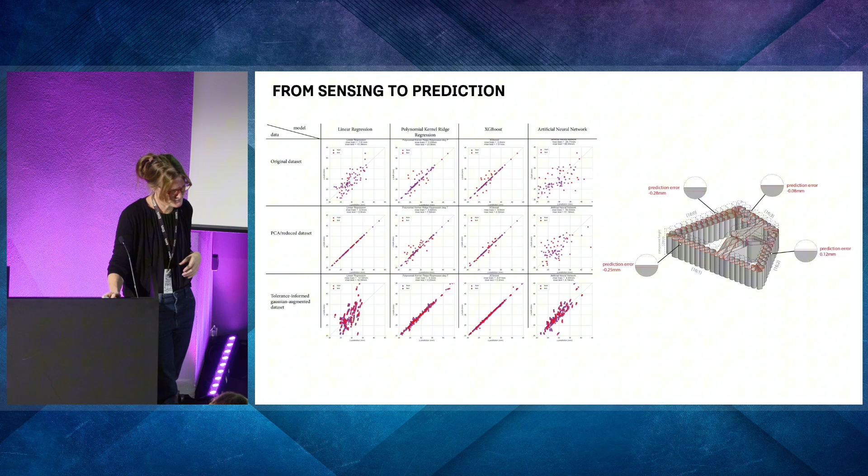I think when we look at this, we can see there are very large indicators pushing us towards these things. I think we are in a schizophrenic moment now in CITA, because a lot of this is very basic technological development. We create new monitoring frameworks, new machine learning algorithms, we are developing new printing technologies.

But at the same time, I think it's a balance - or a balance sounds like it's in negotiation with each other, but maybe it's just two-faced. On one hand, yes, we're interested in the direct technologies we're developing - Cameron was showing very clear understanding of what these workflows need to do, how we can actually encode them, etc. And at the same time, we're also curious about the deeper ontological questions that they bring forth.

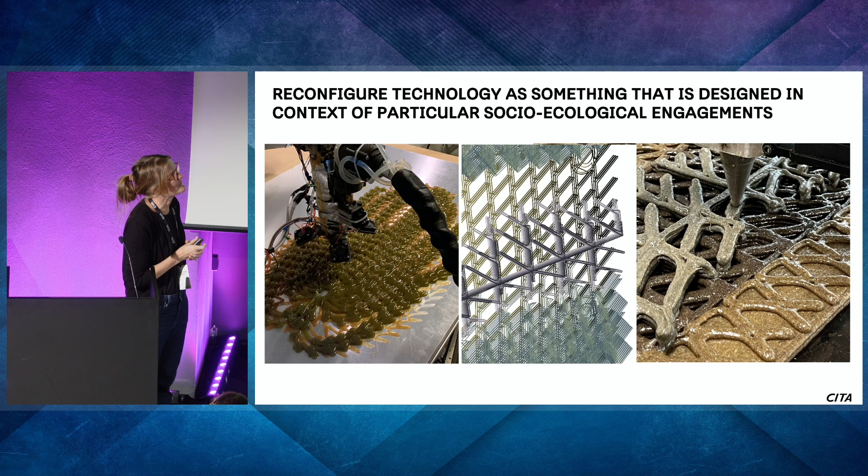So I love that when I walk through CITA, I will see projects that I don't really even understand. I'm wondering what the hell is that doing here. I think that richness of expansive exploration and testing is a really fundamental part, not only to our practice, but to our practice as a whole.

So, thank you. Thank you so much, Mette.